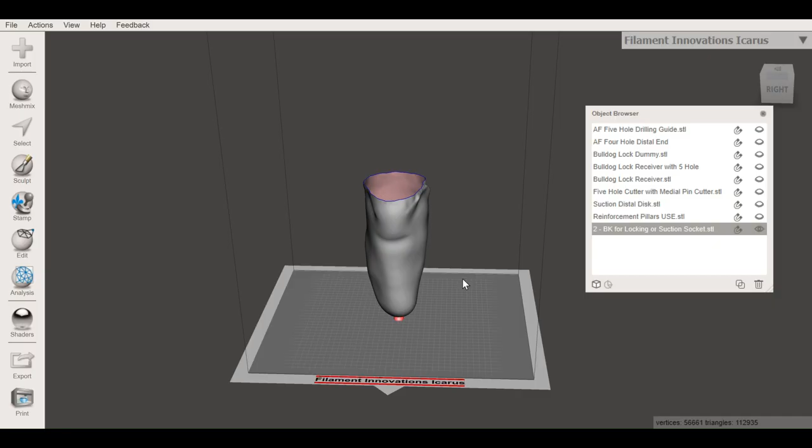What I will do initially is go up to View. You can either show or hide the object browser initially. You can also show or hide the printer bed. In order to make sure that we are in the correct units for what we are designing, I have right now the Filament Innovations Icarus 3D printer chosen to show me the build volume of this particular print.

So the below the knee model here looks sufficiently scaled. Otherwise you wouldn't even see this scan. It would be so micro small that you wouldn't see it on the grid at all. And this has to do with when you take a 3D scan, whether you are exporting that scan in millimeters, centimeters, or meters. And typically, working with Meshmixer and the couple slicer programs we use, we want to be exporting our scans in

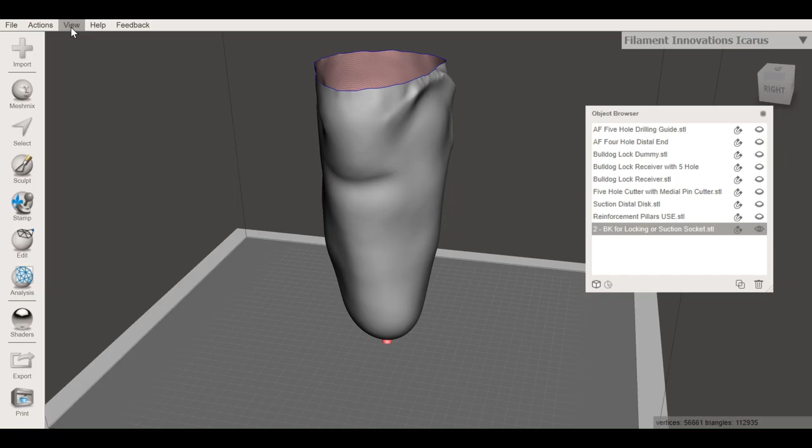millimeters. If you have the ability to download your scan as an OBJ file, that will allow us to view the color in the scan. If it is an STL file, you will not be able to view the color in the scan. In order to check to see if our scan has any color, you can go up to File and Preferences, and instead of Group Color Mode, we can go to Vertex Color Mode.

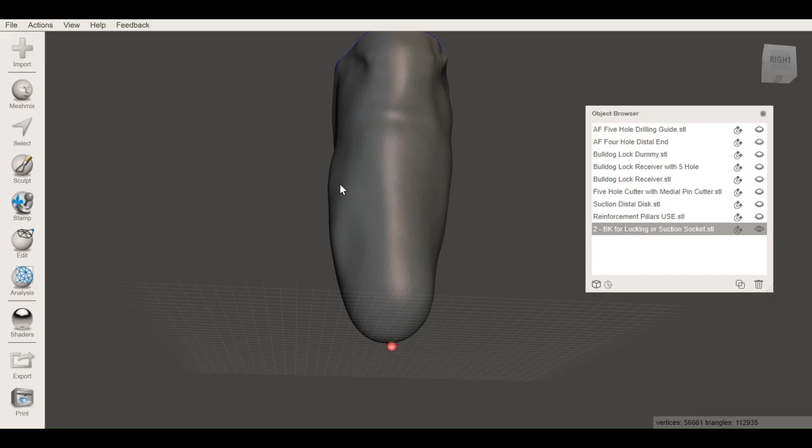In this instance, we don't have much other color other than this gray color, but if we had some kind of indication of any bony anatomy landmarks that were drawn either on the plaster mold or directly on the patient's limb over the liner as we're scanning over the liner, then they would be viewed here. So otherwise, we're going to be working in the group color mode.

So here, what I like to do is designate the object browser as our history tab. So this initial scan, the number 2 BK for locking or suction socket, I'm just going to rename this one 1. Original Scan and hit enter. You'll notice that I have a couple different components here also in the browser that we're going to be using from time to time included into the design so that we can complete the full product.

In this instance, we are going to be using the Bulldog Lock receiver and the Bulldog Lock dummy to create a Vase Mode either test socket in PETG, preparatory socket in polypropylene, or FDM definitive socket in carbon fiber polypropylene. The design is the same for each of these 3 sockets. However, the print settings are going to be different on the back end.

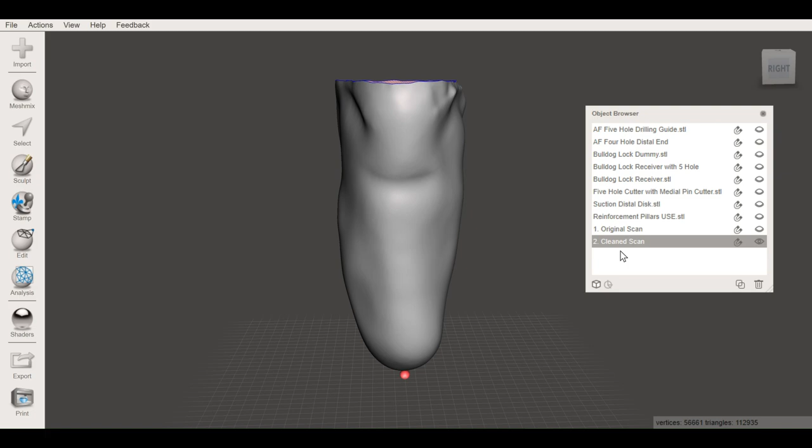So the clean scan here, number 2, the first thing that we're going to do is close off the proximal end. And before I do that, I have a pretty kind of wavy, jagged proximal edge here. I'm going to smooth that out by going to Sculpt, under Surface, Brushes, Robust Smooth, turning down the strength to 30. You can either use the drag bar or you can type into the box here. Turning the size down to about 30 as well.

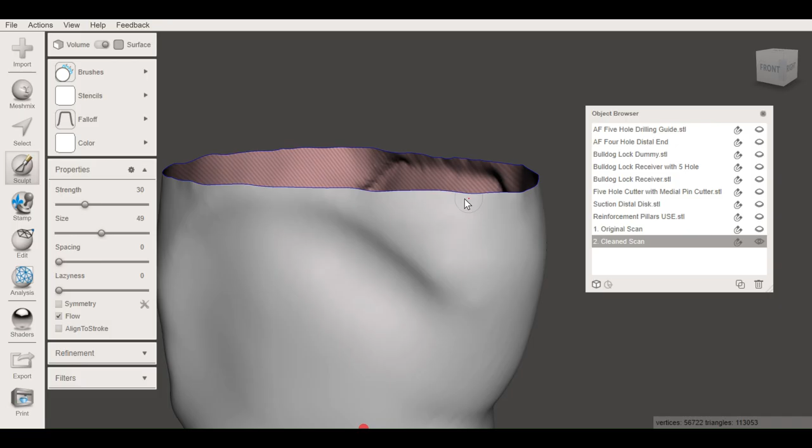And in this case, we have some rather smaller products here on the right hand side. So right now the size 30 is actually quite small. I'm going to just increase the size of that brush in order to give myself a little bit more working room. You will also notice that the brush size is big or small if you have to resize the model in different units in either a scale of 10, 100, or 1,000, going from millimeters up to meters.

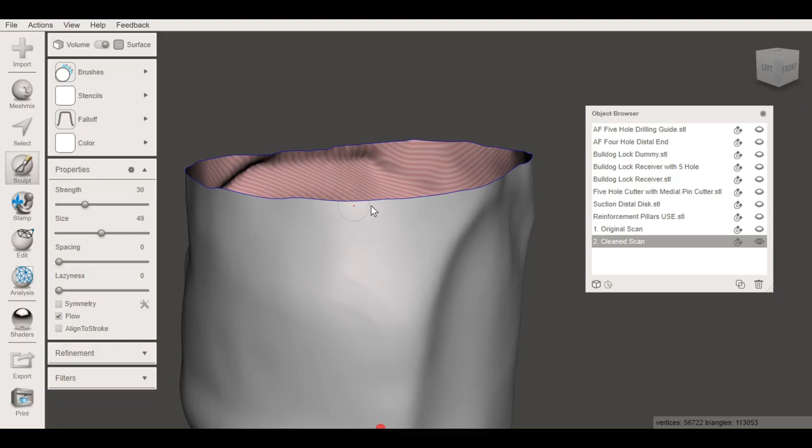In order to fix that, what I would do is export that scan, close Meshmixer, open up a new instance of Meshmixer, and then re-import that scan once you have done the scaling. What I'm doing now is just smoothing around these trim lines in order to get a fairly smooth surface that I'm then going to select and pull upward.

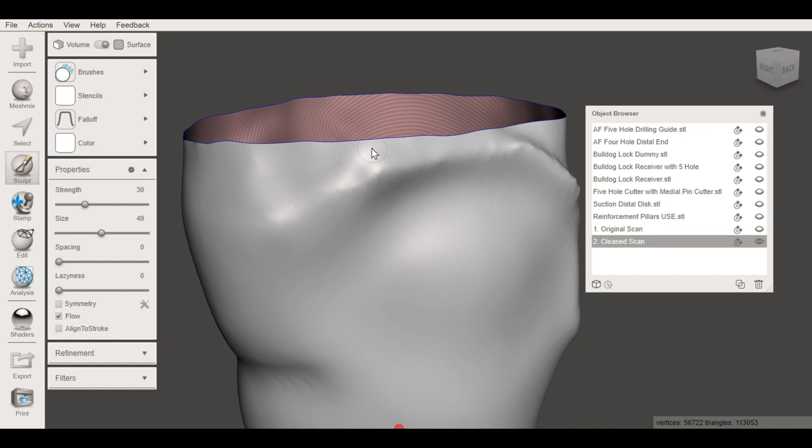Alright, so we'll go to Select, turn down the size. We're going to click directly next to the blue line, hold down Control on our keyboard, and scroll forward on our scroll bar on our mouse so that we can either increase or decrease that selection. Next, we're going to go to Modify and Smooth Boundary. I'm going to turn the smoothness all the way up and the iterations all the way up. We're going to hit Accept.

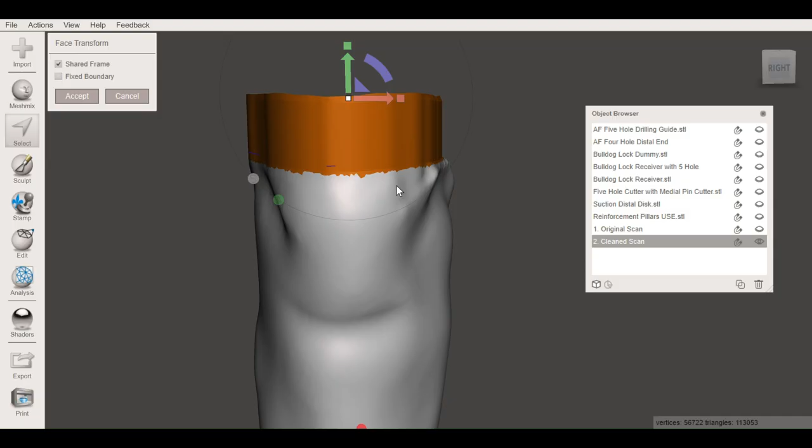Then we're going to go to Deform, Transform. We want to be in the world view instead of local view. And I'll use this green arrow to just pull this up so that I have a little bit more working room just proximal to these trim lines. We'll accept that. And then I'll double click on the color of the main face of the part of the scan that I just created.

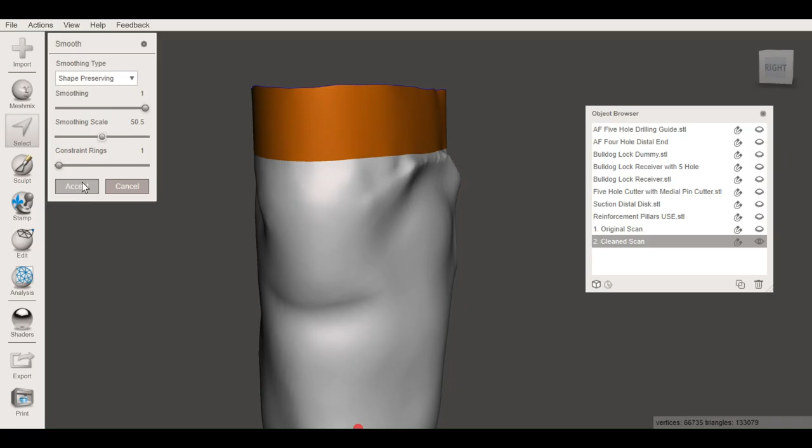I'm going to go to Deform and Smooth. I'm going to turn down the constraint rings all the way and turn up the smoothing scale to about 50. I'm going to accept that. And now go into Sculpt, under Surface, Brushes, Robust Smooth. We'll turn up the size again.

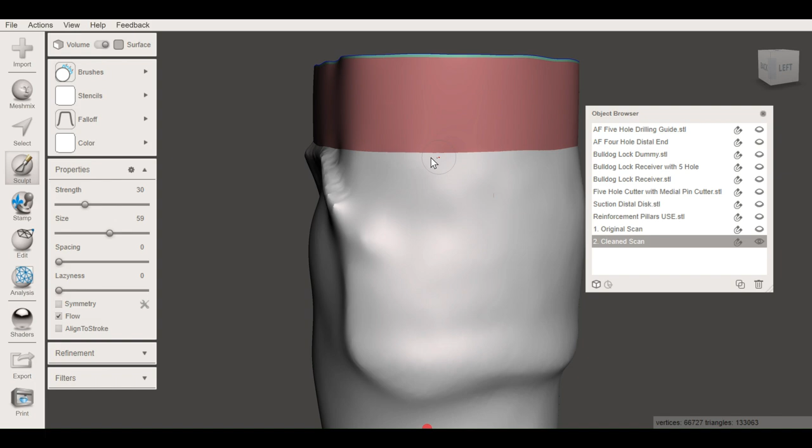And what I'm essentially doing here right along this line is combining these two parts of the scan. If you don't do this, then there could be little micro holes along the scan itself. So we've gone all the way around.

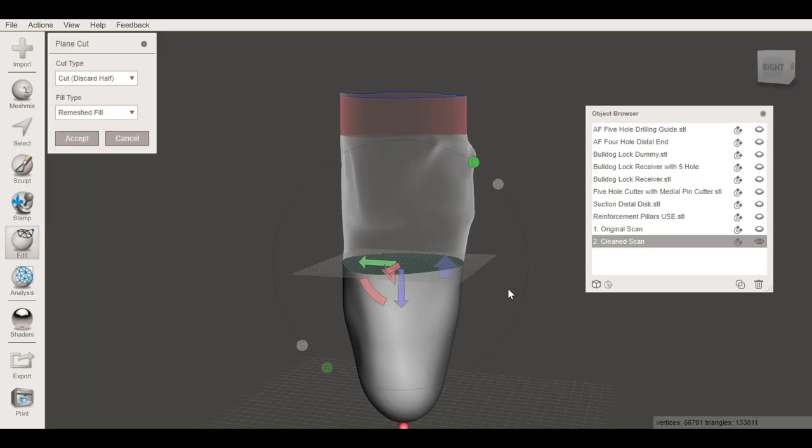Now I'm going to go to Edit, Plane Cut. I'm going to use the big blue arrow to position the plane of what we're cutting upward, and use the little blue arrow to move this cursor upward. And I'll just go a little bit proximal to these trim lines. I'm going to be using Remeshed Fill and Cut Discard Half, and hit Accept.

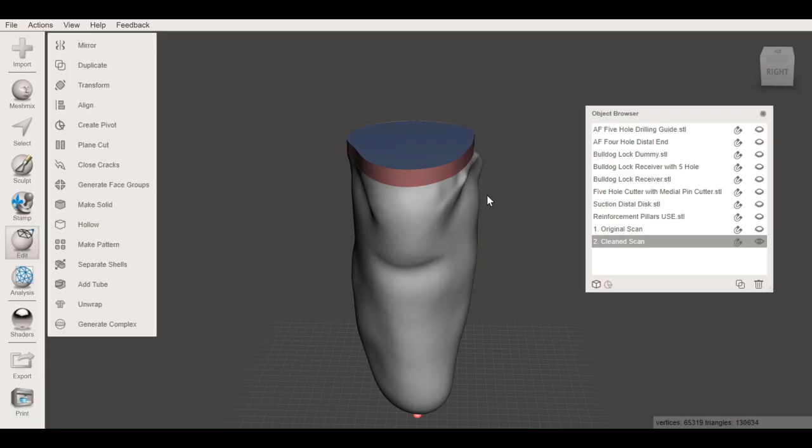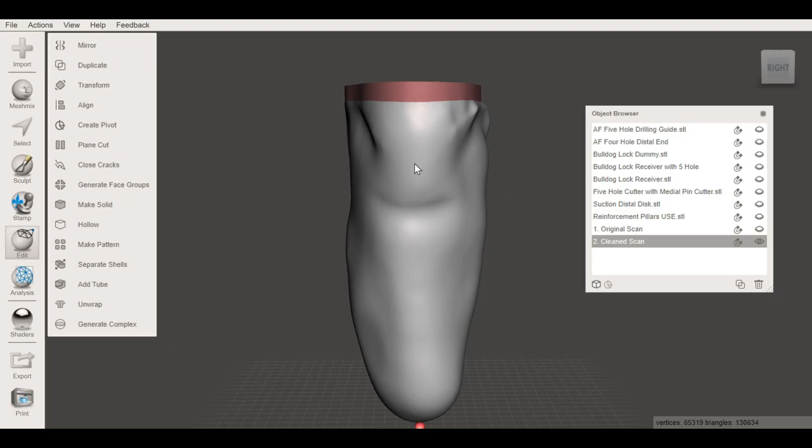Now we have a closed off shape where we have a completely flat proximal end that is going to be optimal for our Vase Mode printing purposes. In Vase Mode, we are printing in one continuous travel path. So because of that, we have to print proximal to the trim lines. We won't be able to print these trim lines as if they were cut out in this model. It's not a lot of material to waste, and it is the fastest way and strongest way to be able to produce an FDM part.

So, a couple other things that I might notice here. We see some striations on the scan in a couple different places, and maybe a couple pokey points, little ridges along some parts of the scan. I do want to smooth those out because those could potentially be visible in the scan itself once we print it. So we'll go to Sculpt, Brushes, Robust Smooth. I'm going to turn up the size, turn down the strength to about 15.

And I'm going to go around the model and smooth out those particular areas that are a little striated. Now at strength 15, I'm really not reducing the volume of the scan. I'm just simply very lightly smoothing it out. Alright, now that we have everything smooth, we're going to call this our clean scan.

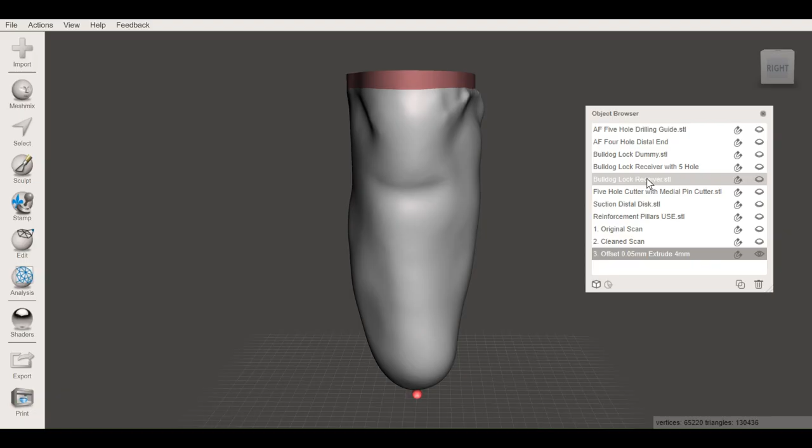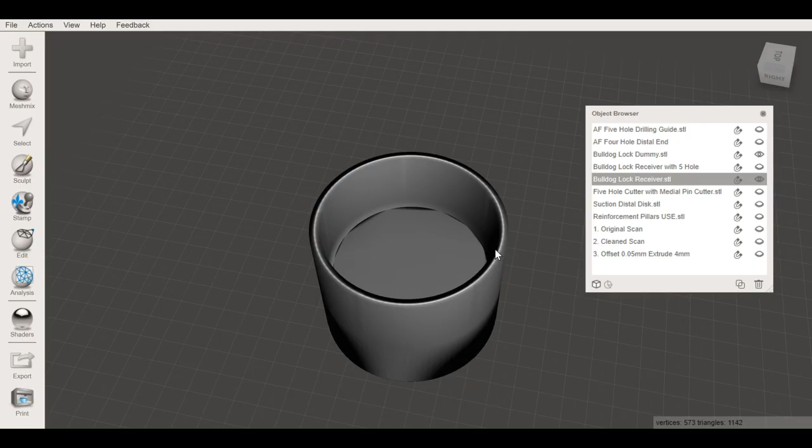So I had said in the beginning that we want to use the Bulldog Lock dummy and the Bulldog Lock receiver. What those particular devices look like, if we use the eye here to show them, and we turn off this one that we're actually working on, there is a cylindrical receiving end that is 4 millimeters in wall thickness. And if we take a look at the inside view by turning off the visibility but having the name selected, we can see that the distal end is actually 6 millimeters, the walls are 4 millimeters.

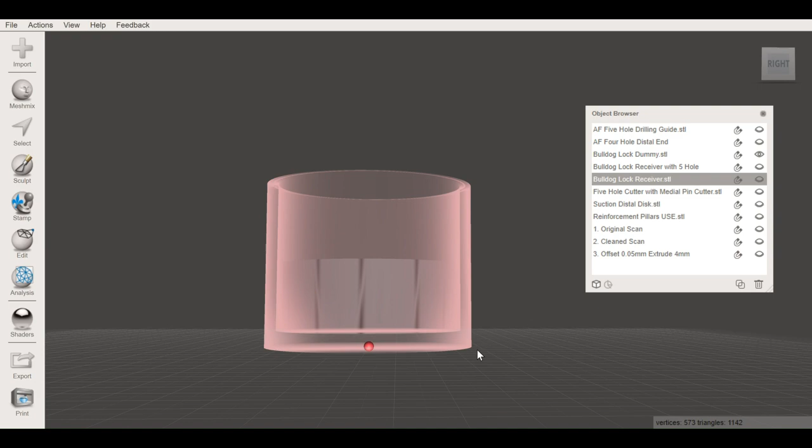And when we go to import these items into Meshmixer, they're going to import in this exact location where they should be. So the Bulldog Lock dummy is in the position where we want it. We're going to use the dummy as a reference point to now move our step 3, the residual limb, into alignment with the Bulldog Lock dummy.

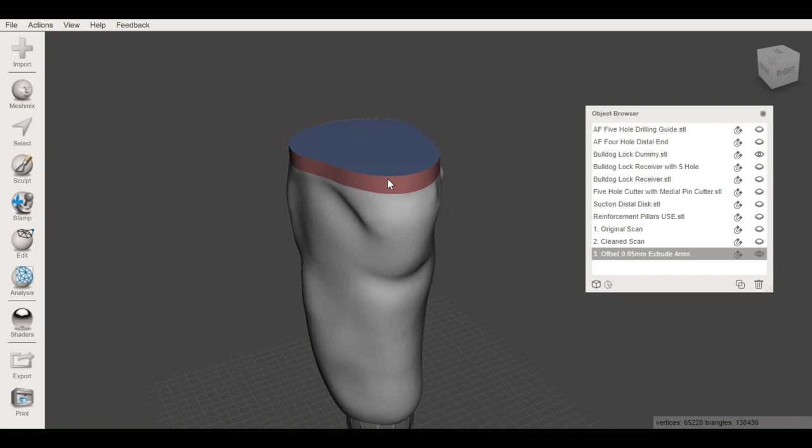So first, you'll see these different colors on the proximal edge of the scan. Those indicate different face groups of the scan itself. I'm going to go to Edit and Generate Face Groups, and I'm going to turn up the angle threshold. What that's going to do is it's going to take all the very little triangles that would otherwise be very multicolored, and we're just going to turn them into one continuous color on the main body of the scan, and then one color on the proximal edge. And hit accept.

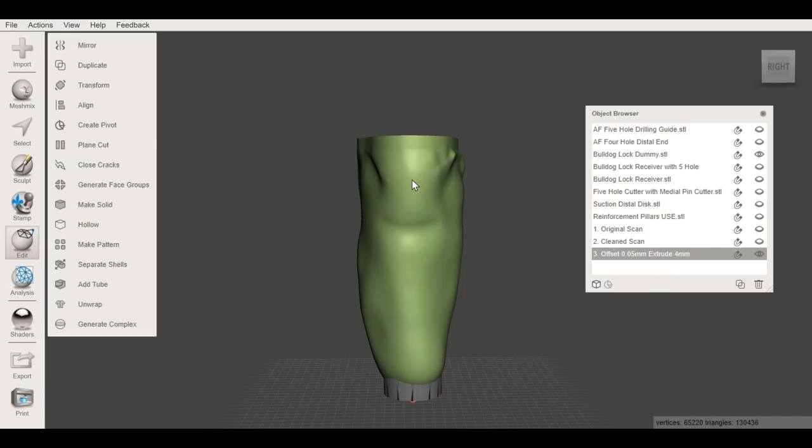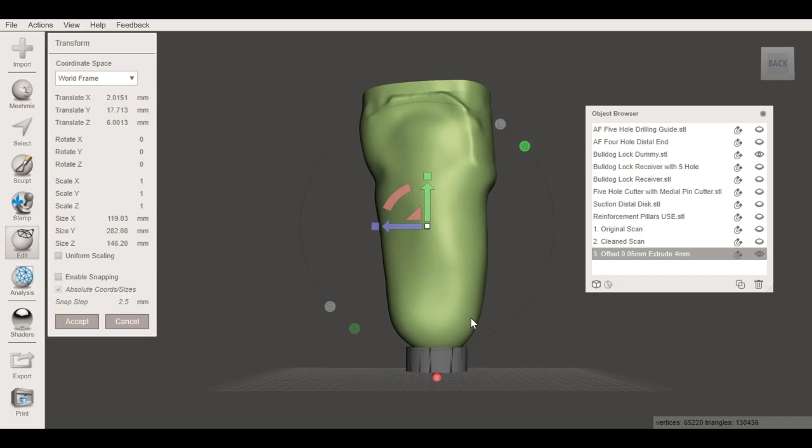Now, we can use the transform tool under edit while we have the residual limb selected to, under the world frame, use the arrows to position the residual limb exactly where we want it to be. Alright, so from the anterior view, we look pretty good there. From the medial view, we also look pretty well aligned there. So we'll hit accept.

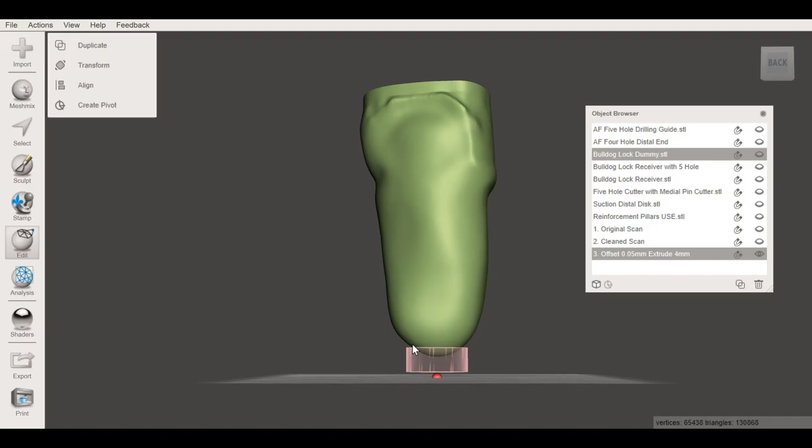And then in order to figure out how far down into the dummy we actually want to bring the limb, I'm going to uncheck the visibility of the dummy, hold down Control on my keyboard, and left click on the name of the dummy. So now you can see directly through the dummy, and you see the distal edge of the residual limb. We're going to use the transform tool then to bring this up to the very proximal edge of the dummy.

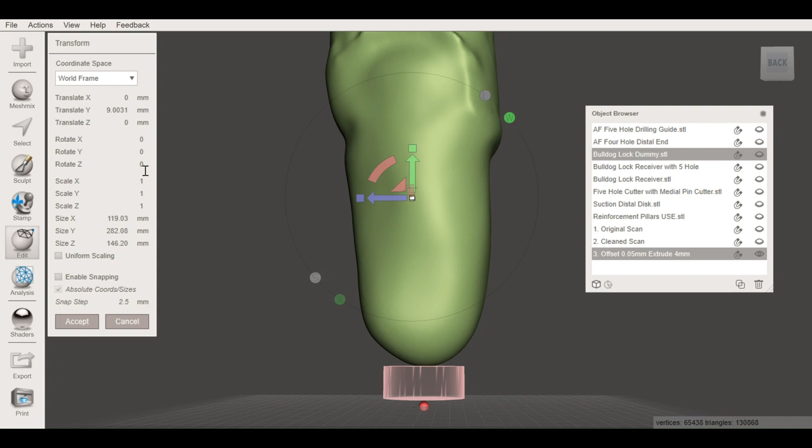Now, based off of the concavity that is within the bulldog locking mechanism itself, it's a 10 millimeter concavity to the center. So that means that we technically could bring this down. If you noticed, this says about 9 millimeters there. If we go down to about 0, and so that was 9 millimeters. If we go down to -1, that would be about 10 millimeters into the bulldog lock dummy, and that is as far as we can basically go to bring this residual limb into the lock itself. Otherwise, we're really impeding on the distal limb shape.

In some cases, you might want to give it just a little bit more room, so maybe you only bring it down 8 to 9 millimeters. Now in this case, we have a rather narrow distal limb shape, so you do see these triangular spaces on each side. That is simply going to be space in the socket, which is not unlike the traditional method of placing a bulldog lock dummy onto a plaster mold. Some people would end up filling these gaps with plaster so that you have a smooth transition, and because of how the receiver is designed, you will end up still having this smooth transition in there.

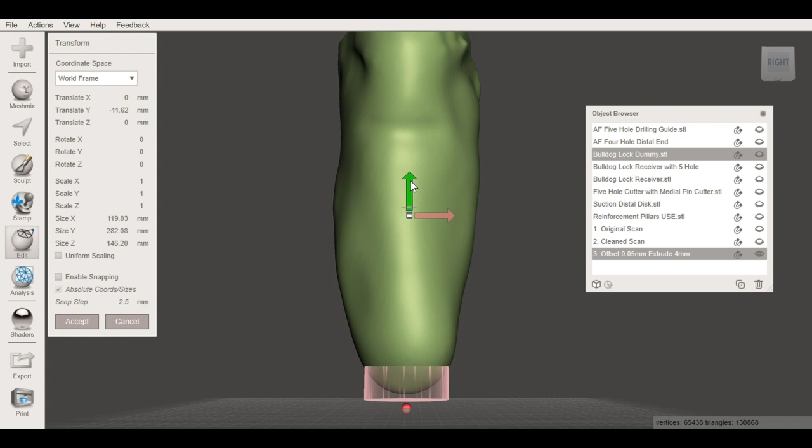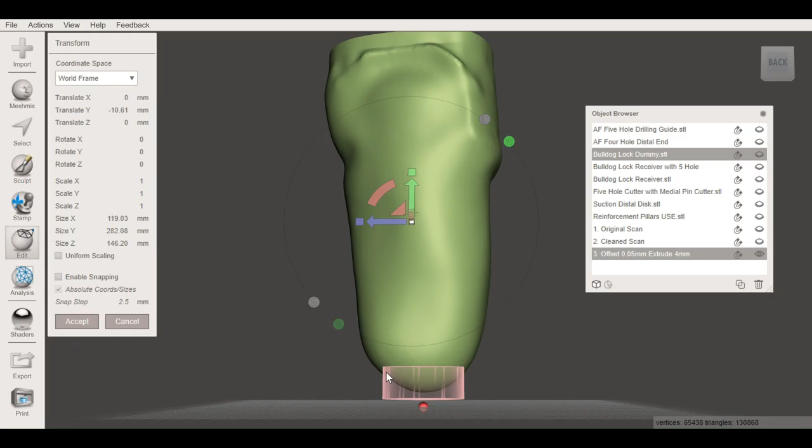If you had a rather wide distal limb shape, you would really want the distal limb shape to be touching on both sides, front to back and side to side, as far down as it would end up going. So from an anterior view, I see that I am contacting these two outside points rather nicely. However, from a medial view, it looks like I'm actually impeding on the distal limb. So I have to go back up to where we're just touching on either the medial or the anterior view. Again, in some cases, you're going to end up having little triangular holes in the socket, but that's not unlike the traditional method of fabricating this.

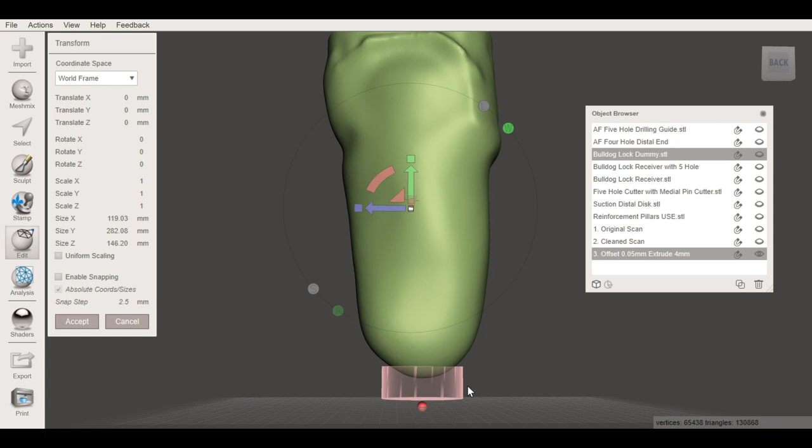Now, with a narrow distal limb, I know that I'm going to be too far down into the dummy, so I'm going to go back to our original kind of starting point before I started this, and that was about 9 millimeters into the dummy itself. Again, you can go up to 10 millimeters into the dummy. If you go less than 10 millimeters, you are lengthening the socket. If you go more than that, then you're short socketing the person.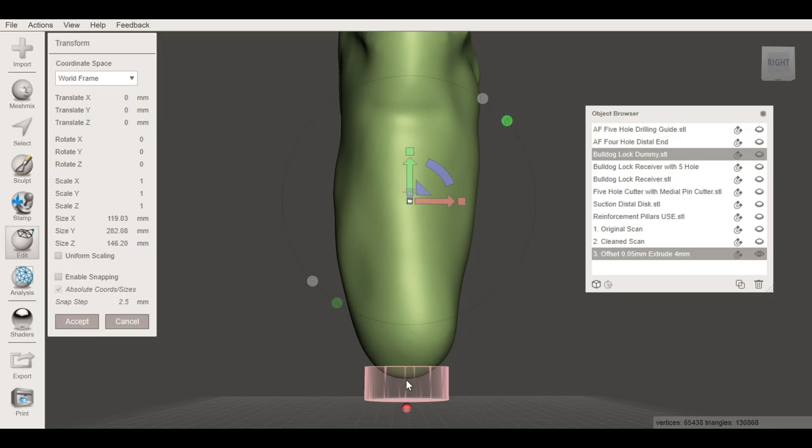So we'll start out about 9 millimeters just to make sure we have enough room, and hit accept. And now we want to end up creating this offset 0.05 millimeters and extrude 4 millimeters. So at this point, this is where you are basically thermoforming plastic over this mold, but rather what we're going to do is select this whole outer surface, bring it away from the model ever so slightly, and then we're going to give that surface a thickness.

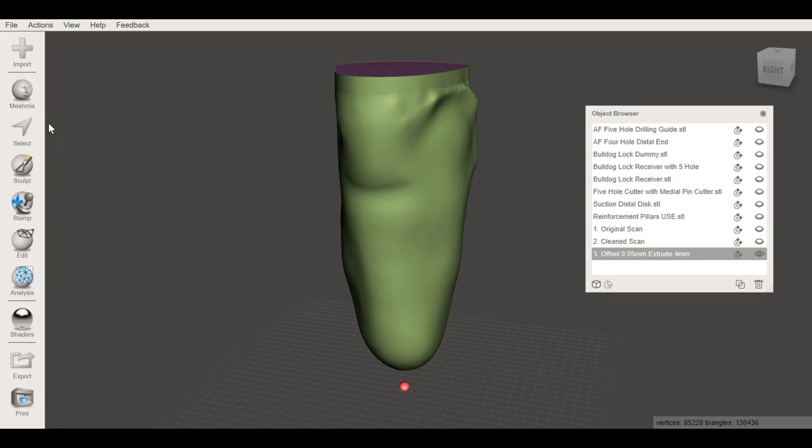So I'll go to Select, double click, left click, and you're going to select the entire main body of the scan. You'll notice that the proximal edge is not selected. That's fine, that's what we're looking for. We're going to go to Edit and Offset. So we've offset by 0.05 millimeters, and we can click into the box below it. We're going to allow Meshmixer to go through its computation and solve this. We're going to hit Accept.

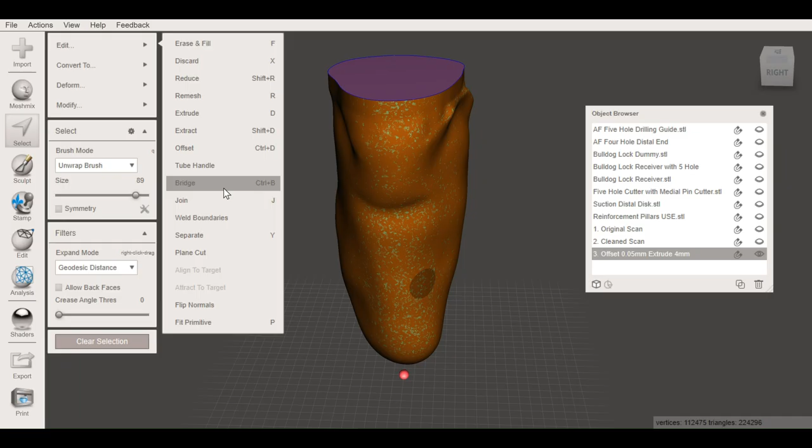Now, while we are still in the select tool here, underneath the Edit, we're going to go back to Separate. And now, clicking on just the proximal edge here, now it is a completely separate part of the scan than the outside shape that we wanted. So this other part of the scan we can simply delete out of the equation. We don't need that part.

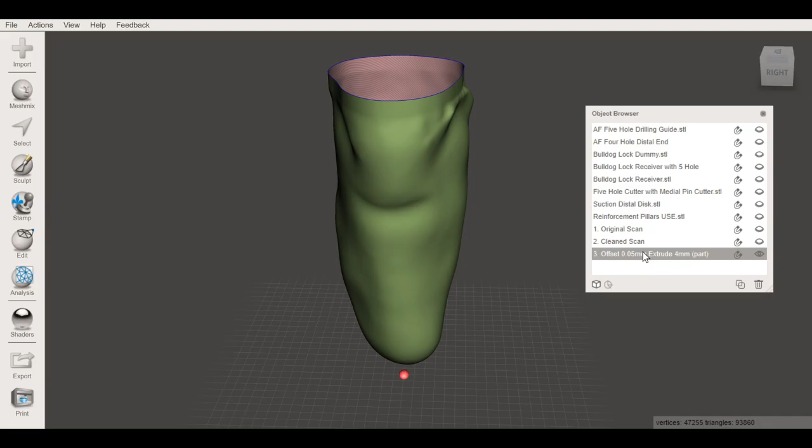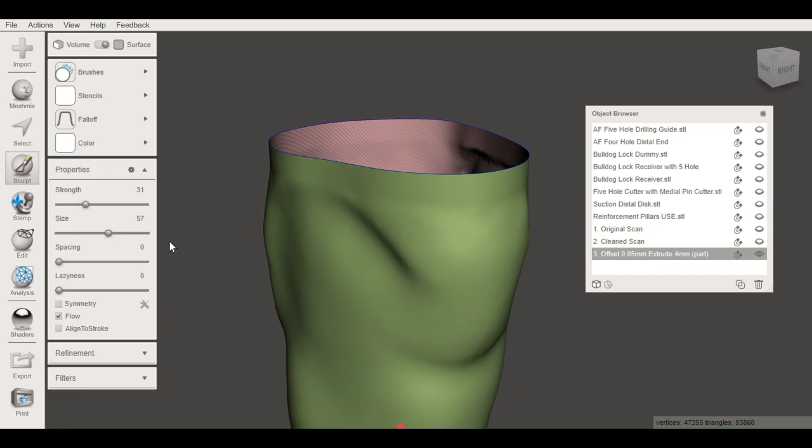Selecting the offset 0.05 millimeters again, we're now going to go through the steps to extrude this. So up at this proximal edge, the blue line, if we simply extruded this right now, we would end up with very spiky points that would be coming off of the proximal end. So we're going to go to Sculpt, under Surface, Brushes, Robust Smooth. Strength about 30. Our size is going to be appropriate to the limb shape and the model. Typically we're at about strength 30, size 30.

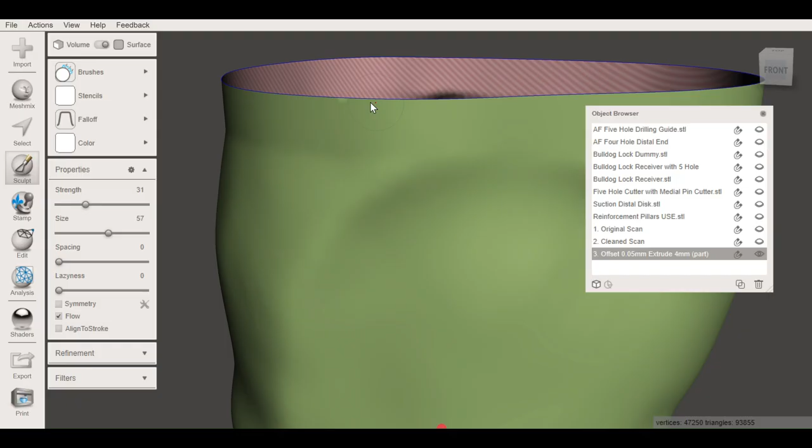And you'll notice that I'm actually following this shimmering bit of triangles that I'm basically remeshing and smoothing as I go along this proximal edge. You'll notice that my cursor is just below the blue line as I do this. I'll go all the way around the model. Once I've gotten all the way around,

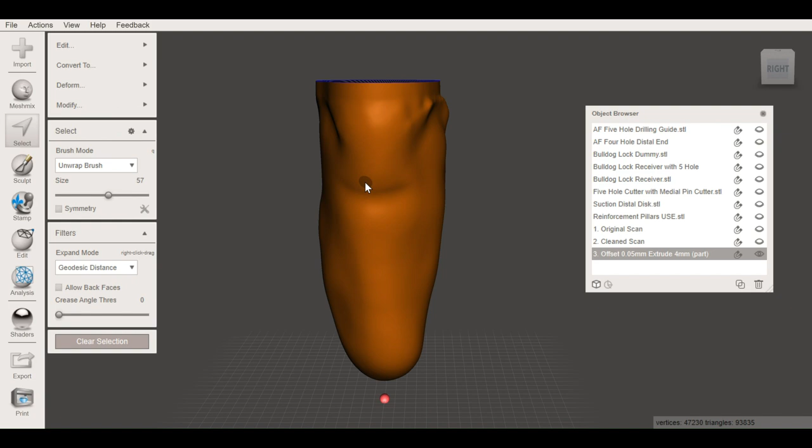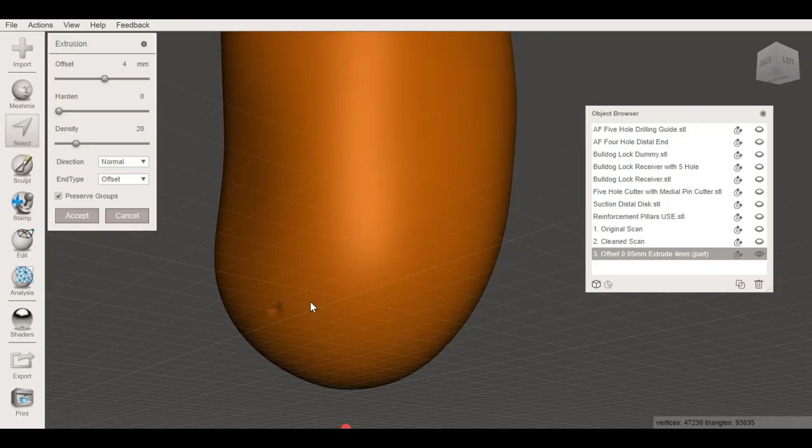now we are going to select, double click on the main face of the model, edit, and extrude. We're going to click into the offset and go for 4 millimeters in a normal direction. And at this point, we're going to take a look around the scan to make sure there aren't any other artifacts or what I would call craters in the scan, such as this. So right here, we have a portion of the scan where there was a micro hole that we otherwise have to smooth over to close that before we do this extrusion.

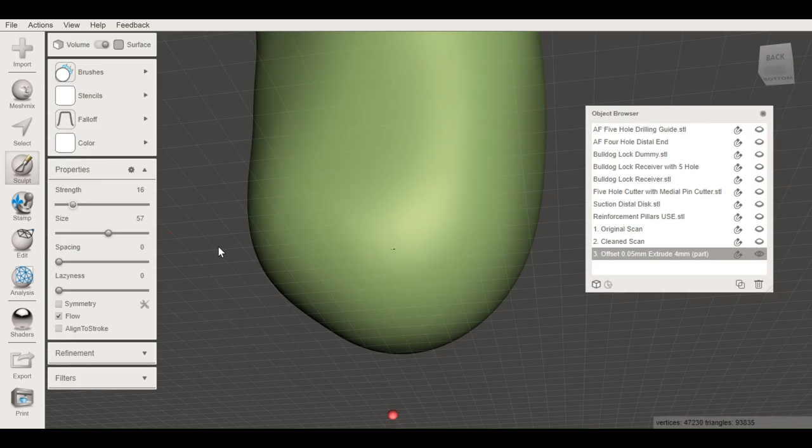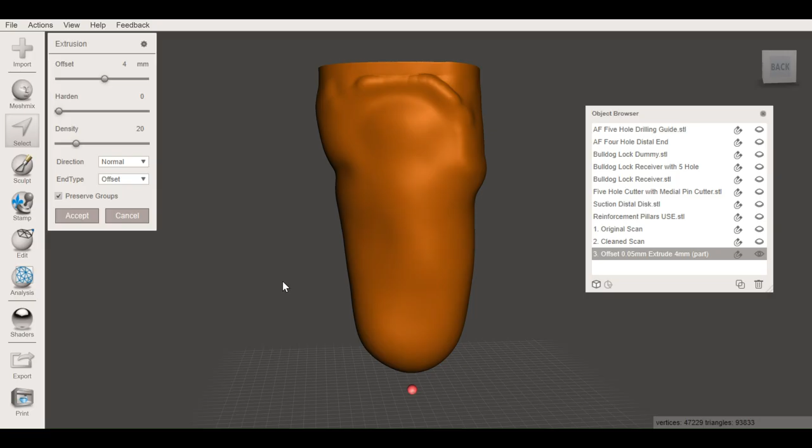So we're going to cancel, sculpt, and you might see this small black kind of shimmering aspect here. We'll go to Brushes, Robust Smooth, turn down the strength to about 15, and go over that one area. Now going back to Select, double click on the main face of the scan, edit, and extrude. 4 millimeters. Direction goes to normal. Look around the scan, make sure we didn't miss any others. Looks pretty good.

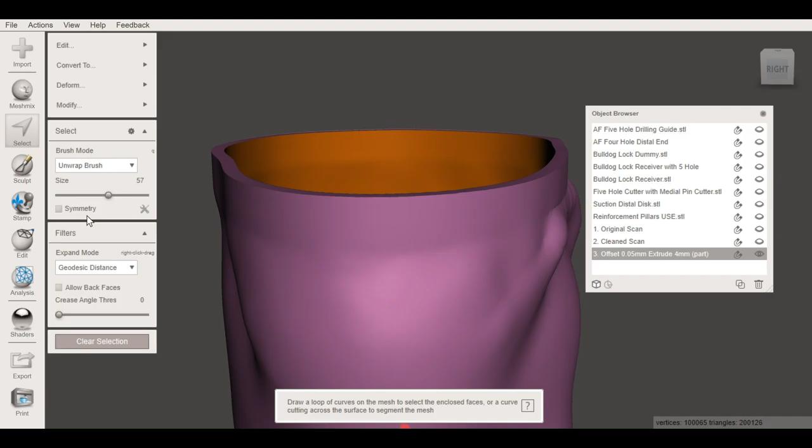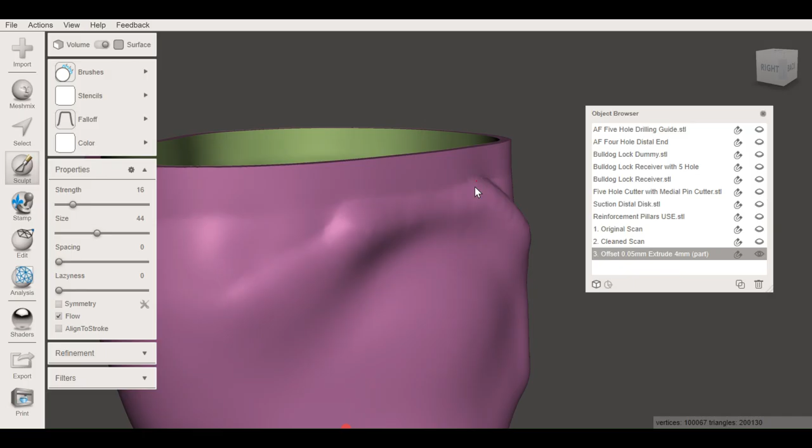And then we're going to look at these top trim lines and notice that they're ever so slightly just not crisp and rounded. So I'm going to harden 100, and that's going to give me a nice crisp finished edge. I'll hit accept. And then sometimes where some aspects of the socket are actually kind of folding in over itself, I will go to the sculpt tool again under Surface, Brushes, Robust Smooth, and just target that area ever so slightly to close those little gaps.

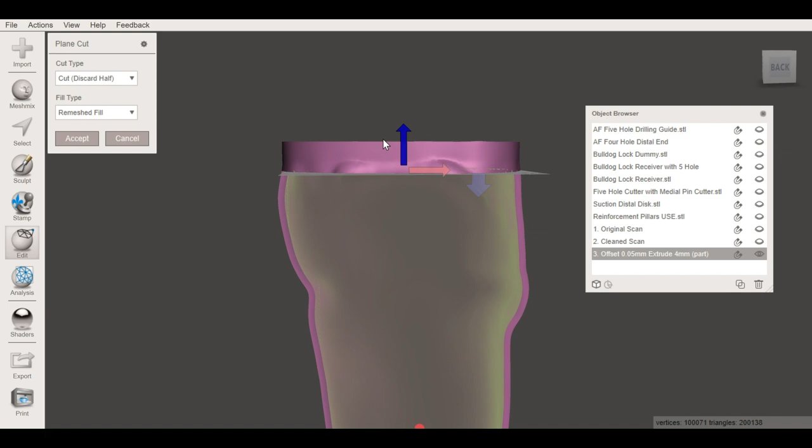Now, with the very proximal edge, I want to make sure that for Vase Mode, we are printing one last completely flat layer. In order to do that, we're going to go to Edit and Plane Cut, move the cursor proximal, click on the big blue arrow, and we can just plane cut this just proximal to the trim lines so that we're not wasting too much material.

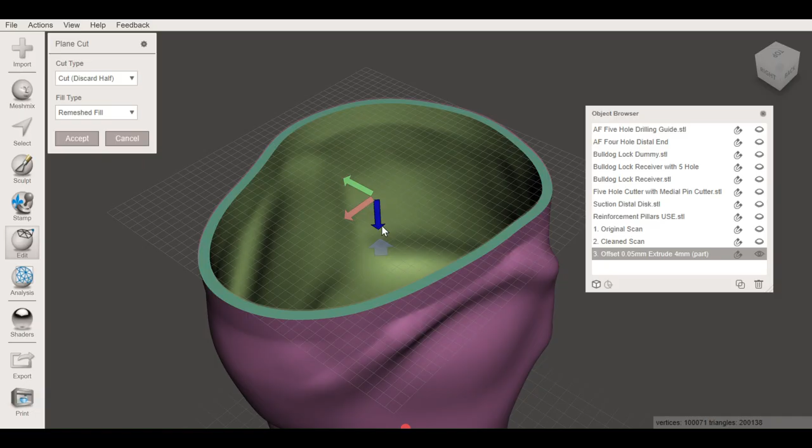You'll notice on the proximal edge that we have a different face group now, whereas if I went up to the very proximal edge, you'll see exactly where that face group ends up changing color. So I'll go down just proximal to the trim lines, under Remeshed Fill, Cut Discard Half, and hit Accept.

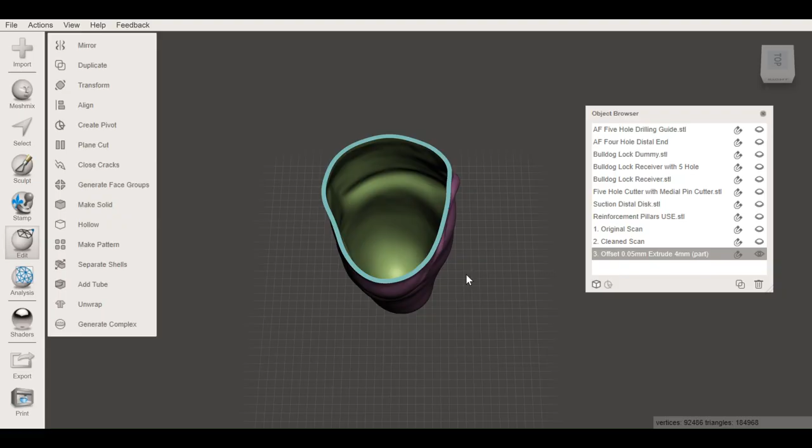Now I have my offset 0.05, extrude 4 millimeters. This is basically our Vase Mode socket. However, now we need to attach the Bulldog Lock receiver. So I'll save as I go.

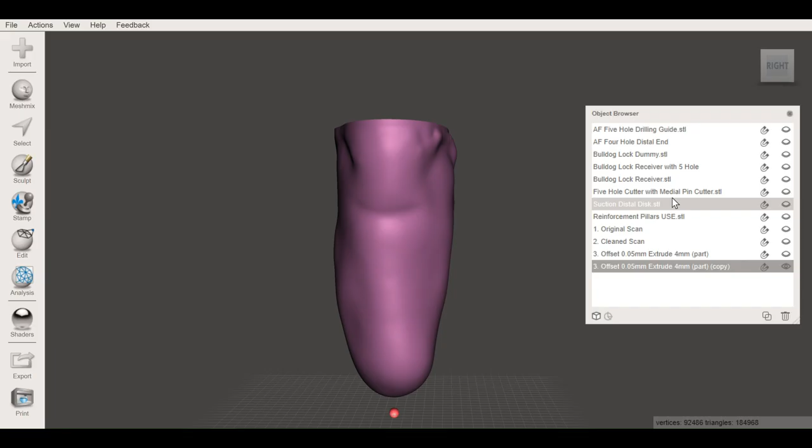I'm going to duplicate this part. Again, it ended up duplicating it twice. We can just delete out the second one, turn off that first scan, click on to the second scan below it. We're going to turn on the visibility of the Bulldog Lock receiver, and clicking on the name of the receiver, we're also going to duplicate that.

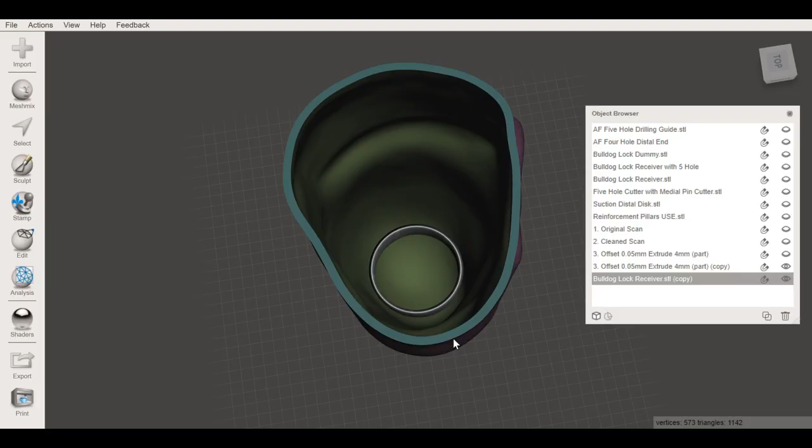Turn off the visibility of the receiver, and you'll notice that going up into the socket, you actually see the receiver on the distal aspect of the socket. Due to the nature of Vase Mode printing, we will only see the outer edge that is printed of this receiver. So we actually won't see this cut out part or the receiver going up into the model.

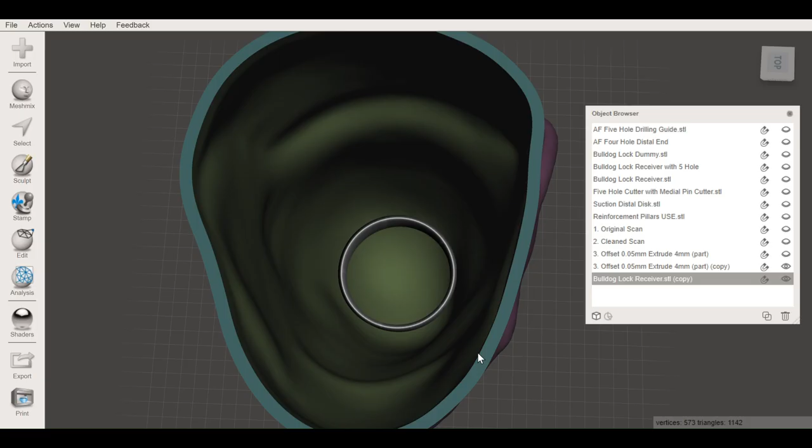In order to set up what is actually going to be the socket, we'll name this test socket. Now with the test socket selected, I'm holding down Control on my keyboard and left click on the Bulldog Lock receiver that we copied. And we have a couple different options over on the left hand side under Edit. We have Combine, Boolean Union, Boolean Difference, Boolean Intersection.

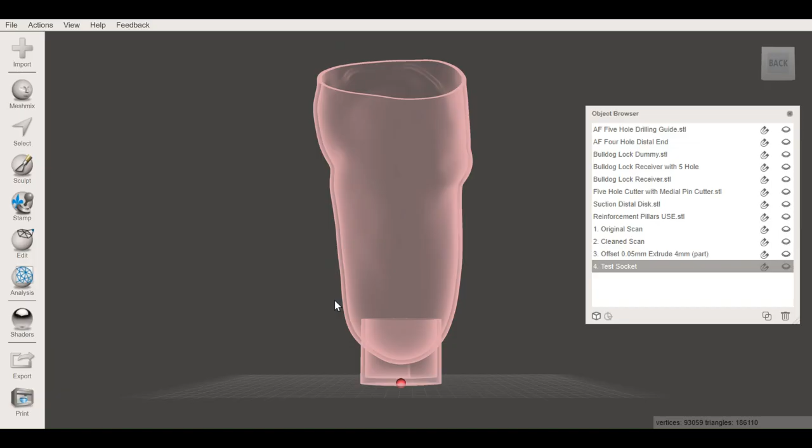For the purposes of printing in Vase Mode, you only want to combine these two scans and tell Meshmixer that this is basically just one scan. So when we have unchecked the visibility, you'll notice that these two scans are now together, and that's exactly what we're looking for.

Now, when you have a rather narrow distal limb shape, you might think, I don't really need any reinforcement because there aren't very large overhang angles. However, right at this point where the receiver ends up meeting the socket, that's going to be one of the weakest points in the socket. So we really want to use these reinforcement pillars, turn on the visibility there, to make sure that we have any overhang angles actually supported, and the socket is going to be stronger that way.

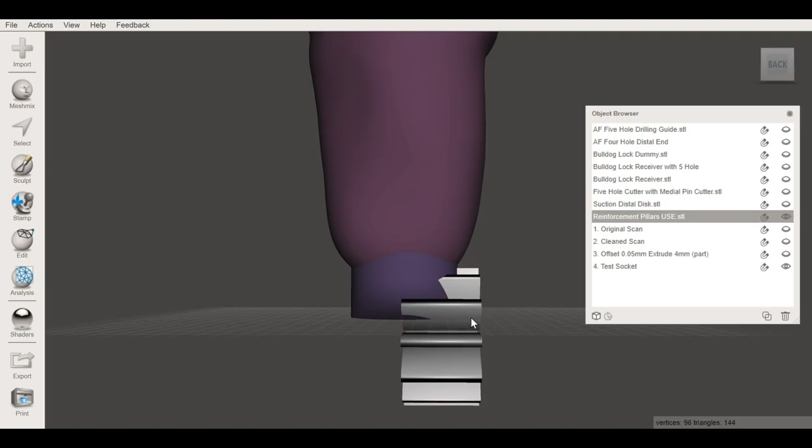So we'll click on to the reinforcement pillars, and you'll notice that they're turned about 90 degrees. So I'm going to go to Edit and Transform. In the world view, I'm going to use the red arc. If I keep my cursor on the red arc, I can move it by any number of degrees. However, I want to move it by exactly 90 degrees. So I'm going to move my cursor out to the rotating grid, and move it exactly to 90 degrees.

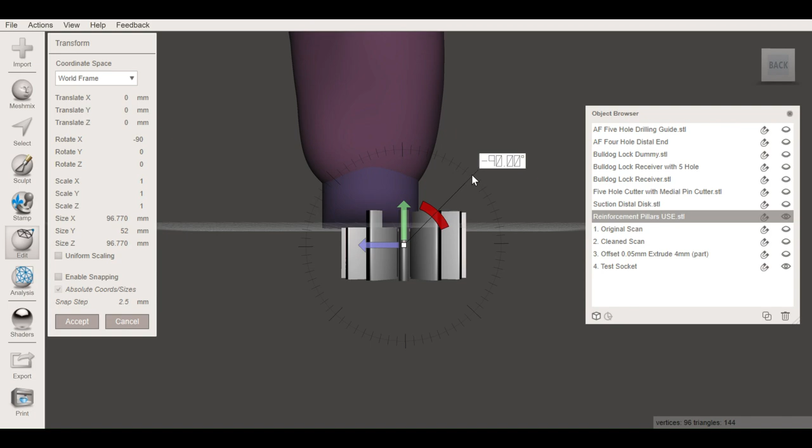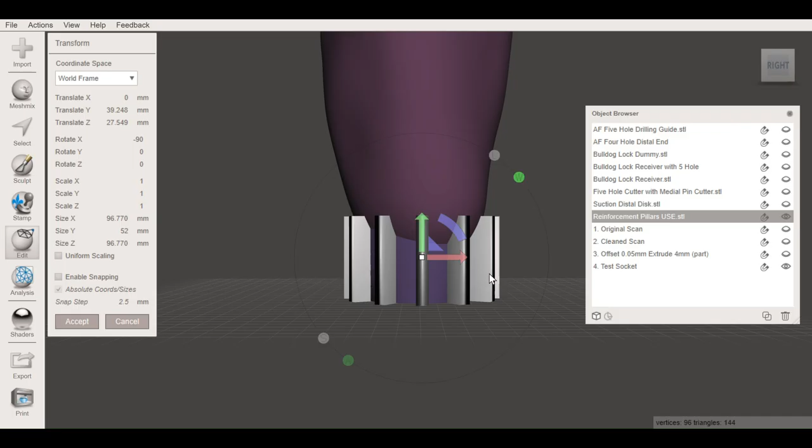I'll then move the reinforcement pillars up into place, and I want to be rather even front to back, anterior to posterior, and side to side, medial to lateral. However, I don't want the tops of these reinforcement pillars actually poking out of the socket. I want them to disappear up into the socket as they're printed.

So in order to achieve that, we can decrease the size of the reinforcement pillars. If we check the uniform scaling button, you can decrease this to 90% or 0.9, and you can increase it all the way up to 1.1. And in between those numbers, they will still print very well in Vase Mode on the Filament Innovations printer with a 2.5mm nozzle with our PETG polypropylene or carbon fiber polypropylene. We have not tested this really with any other materials or nozzle settings, so this is exactly what it will work for.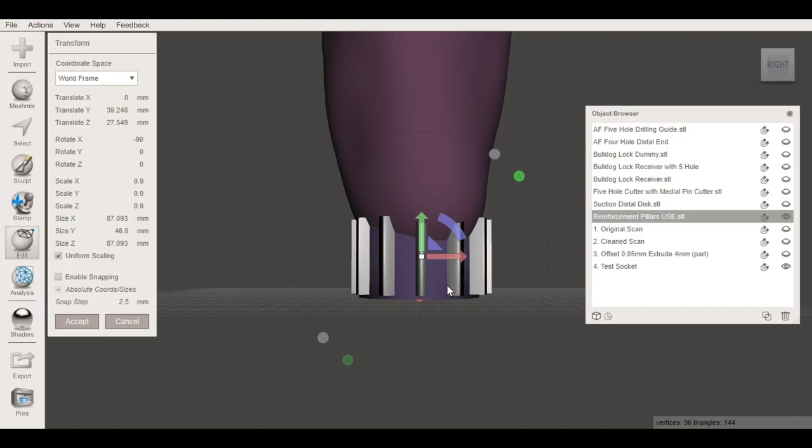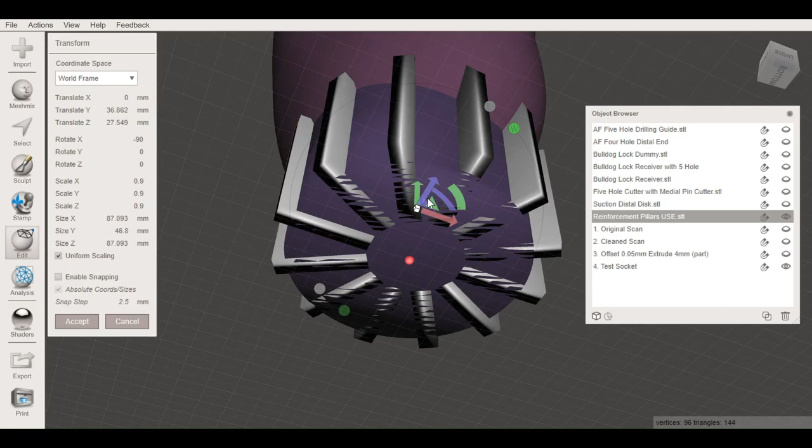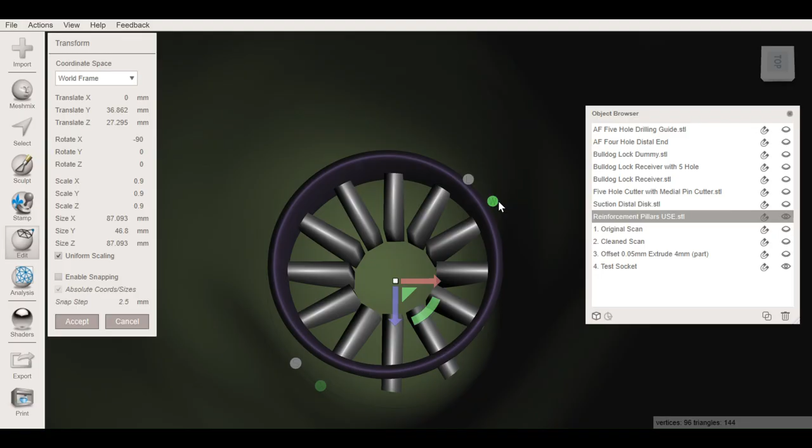We'll move these into place, and if you notice that the reinforcement pillars right now are shimmering on the bottom aspect of the receiver, that is exactly what we're looking for, to see this first layer be exactly overlapping, and we'll have a flat first layer to print with. But still, I have a couple of these reinforcement pillars that aren't disappearing up into the socket. And if we look inside the socket, you'll notice that the reinforcement pillars are sticking up into the socket. And again, that's okay. We're going to end up using Vase Mode 3D printing, and you won't see any of that on the inside part of the scan.

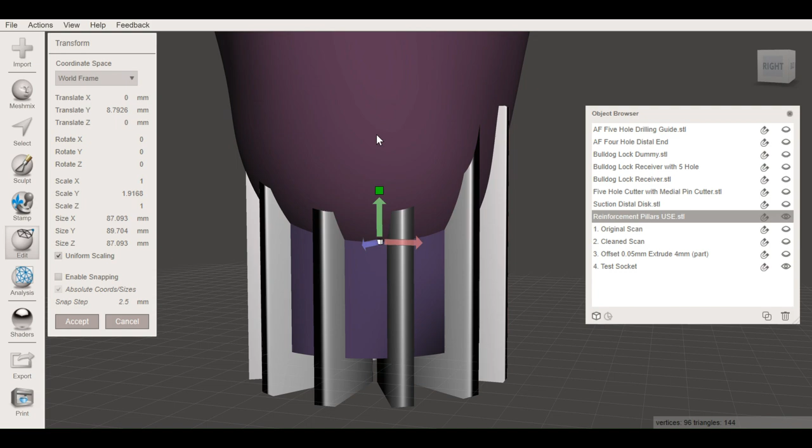So I'm going to hit accept, but go back into transform. Sorry, not duplicate. Edit and transform. And I'm going to pull the green box upward and move the green arrow upward until we really have these reinforcement pillars disappearing all the way up into the socket. So again, depending on how narrow or wide your limb shape, this is very much going to vary how much you have to pull these up in order to get them to completely disappear.

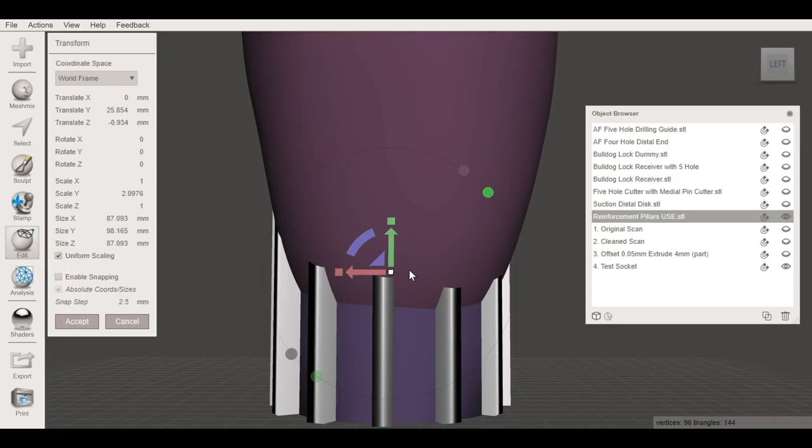We can move them around so that they are relatively spaced out even on both sides of the receiver. And we want to look around the socket to make sure that they're all disappearing up into the socket as they are right here.

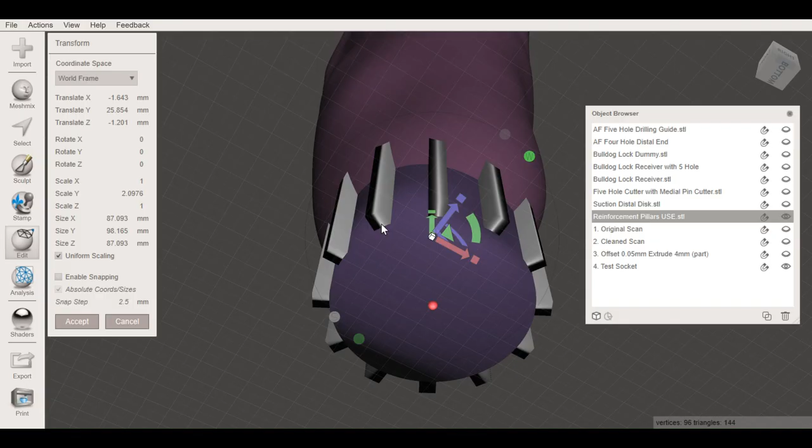Then the last thing is to make sure that the first layer is going to be completely flat. And again, the way that we determine this is the shimmering aspect of the reinforcement pillars and the distal aspect of the receiver. So we're going to get this extremely close, but you'll notice that I can't quite see that from either point of view. So we'll get it to right there, and notice on the top left-hand part of our screen in the translate Y, we're going from 24.929 to 25.391.

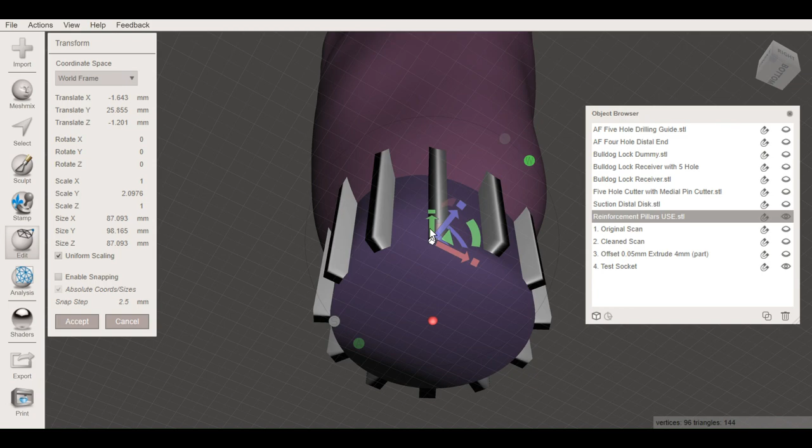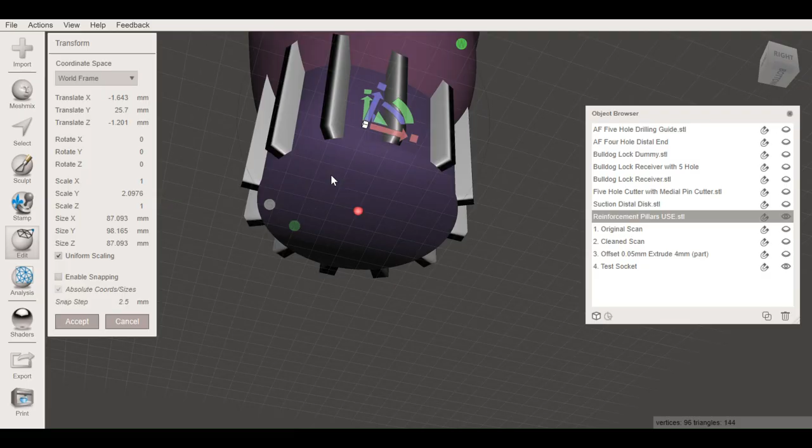And 25.855. So we really want to fall in between here. So we'll try at 25.55. That goes down a little too far. So let's go up to 25.6. Not quite. 25.8. That would be too far up. 25.7. And now we're starting to see that shimmering aspect that is going to ensure that we have the reinforcement pillars and the circumference of the receiver as one solid layer. We'll hit accept.

We will duplicate the reinforcement pillars, turn off the visibility of the first reinforcement pillars, hold down Control on our keyboard, click on test socket so both of these are selected, and hit combine as well. So now all of this would be the main body of our vase mode test socket. We can save this,

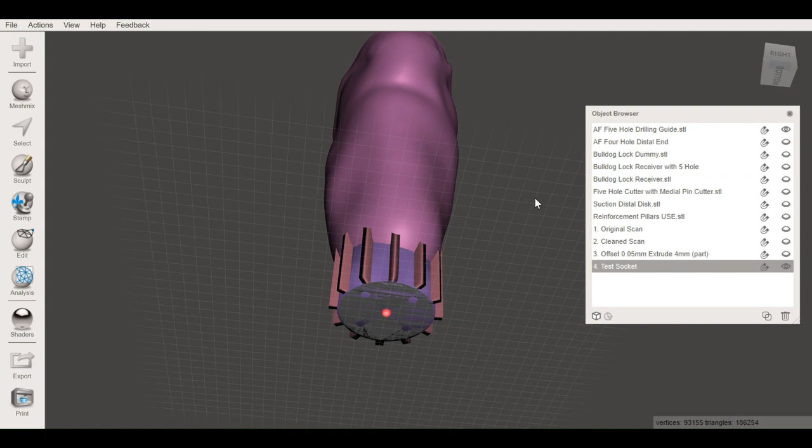and one little trick we have to determine where should I drill out the 4 or 5 holes in the distal limb shape here, in the distal aspect of the socket. I have the 5-hole drilling guide. We're going to turn on the visibility of that particular device, and you'll notice that it is exactly overlapping the first layer of the reinforcement and the receiver.

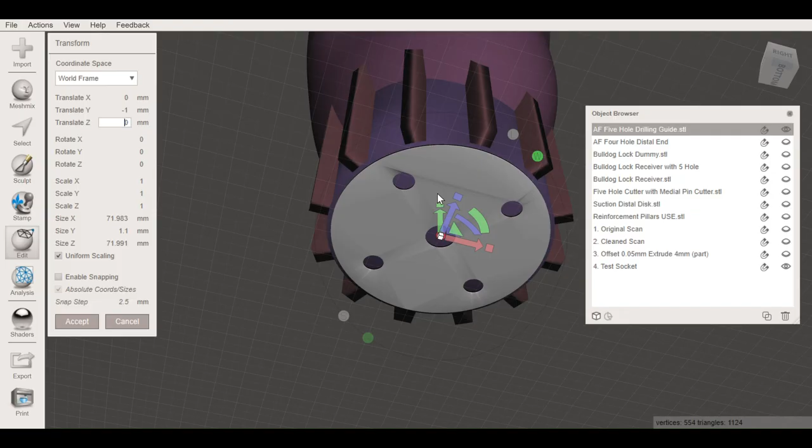Selecting the drilling guide, going to Edit and Transform. I want to move this down exactly 1 millimeter, so -1 millimeter. And that is going to be our first layer. Now, this is going a little bit against what I was saying before. We're actually printing the first layer in non-vase mode so that we can have these holes actually showing up in the first layer of the socket.

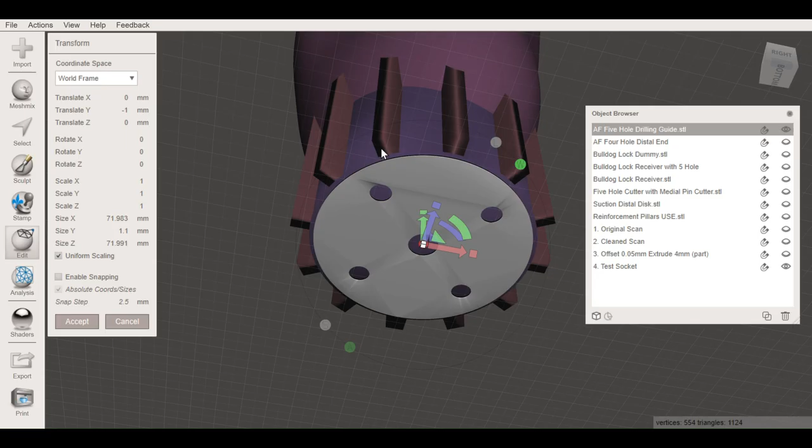And then through some of the power of slicing magic, we print the first layer in non-vase mode and then transition up to vase mode on the second layer for the receiver and the reinforcement pillars and the rest of the socket. So we'll accept that. And now I want to be able to have the drilling guide go all the way out to the edges, the extremes of the reinforcement pillars.

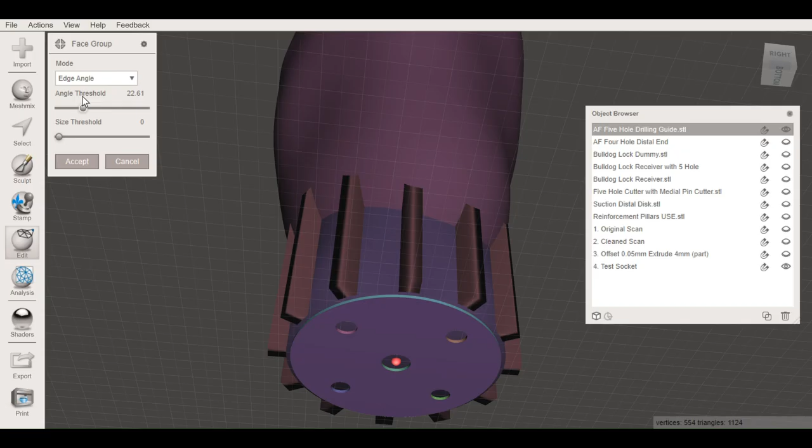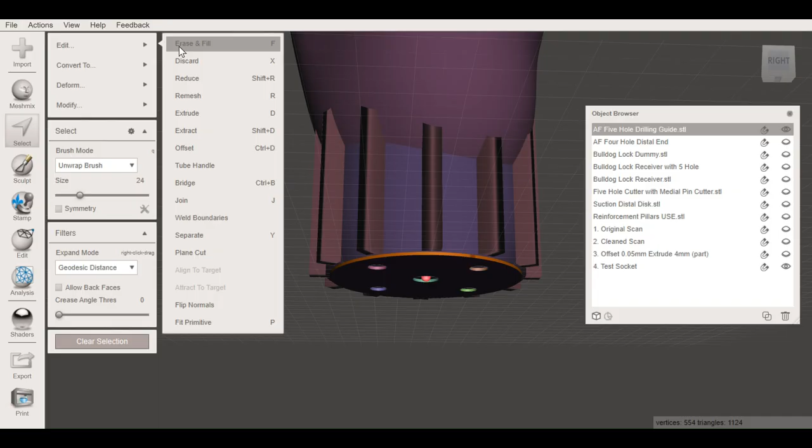So if we extrude, let's say about 10 millimeters, this might differ depending on how large of the reinforcement pillars you have. But we want to make sure that they're extended just past the reinforcement pillars all the way around the socket. It doesn't need to be extreme. Maybe we even extrude only 9 millimeters. But we want to make sure we're not falling off the edge of any of these. So at 9 millimeters, this seems appropriate. All of the reinforcement pillars are inside the edge of the drilling guide. We'll hit accept. You can clear that selection.

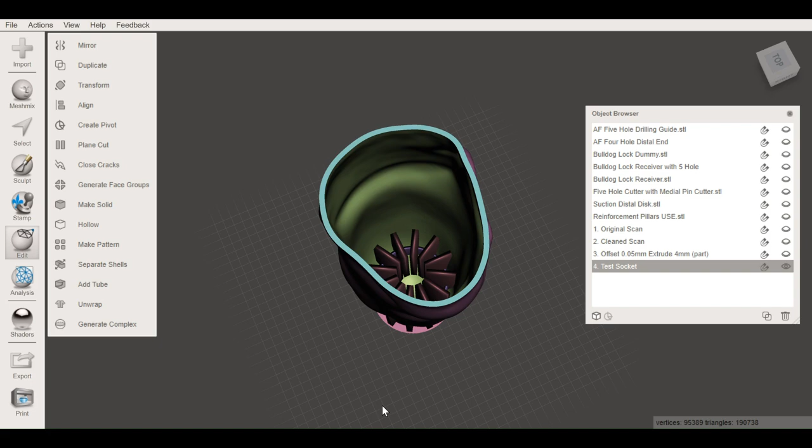We are going to duplicate that 5-hole drilling guide, turn off the visibility of the first one, hold down Control on your keyboard, left click on test socket, and combine one last time. So now you have designed a vase mode socket to be 3D printed with a 2.5 millimeter nozzle for 4 millimeter wall thickness, uniform throughout, for a bulldog lock distal end. I hope this was informative.

We will continue on with other designs for sockets, including suction or vacuum, and again, you can use this design for some different materials, either polypropylene, PETG, or carbon fiber polypro.